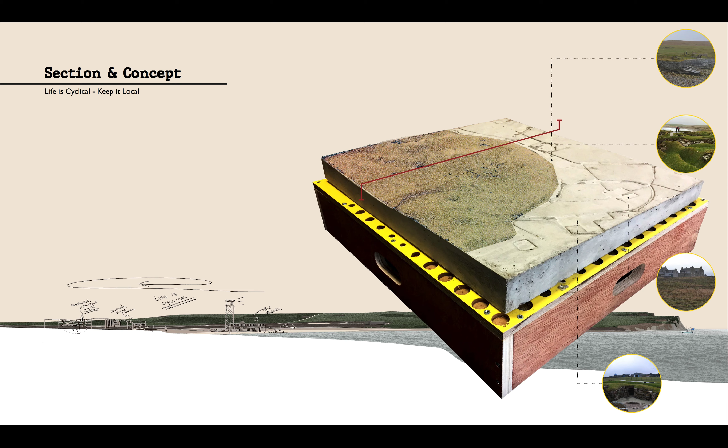One such example is that of the lobster. Ancient Skara Braeans would catch the lobster, then transport it to its own bespoke lobster store, and then cook it on the fire. This project takes the lobster's ancient production line and translates it into a design for a modern, self-sufficient community. So, zooming into the bay, we're building on that production line in its modern format. We have the boat, warehouse, restaurant and dwelling.

And then the site, we have the bay and its water coming up the beach. Then we have the beach road, the only road. And then we have two unexcavated Neolithic sites further inland. And building the master plan, we do so aligned with the production line. So we begin with the boats to catch the lobsters for people to eat, then a boathouse to dock in

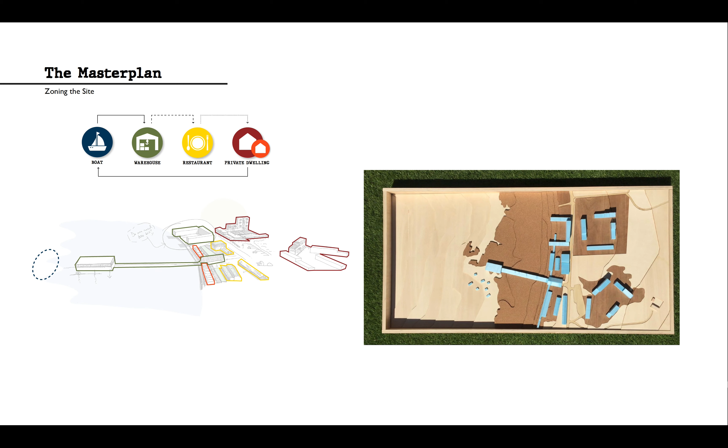with research facilities to enable on-site aquaculture, a pier to connect to the land, then private homes for the crew of these boats to live in, and shared facilities for this collection of people to live as a community. And finally, some shoreline housing to protect the inland development from the rising tides. So, to reiterate, we get boat, warehouse, restaurant and dwelling.

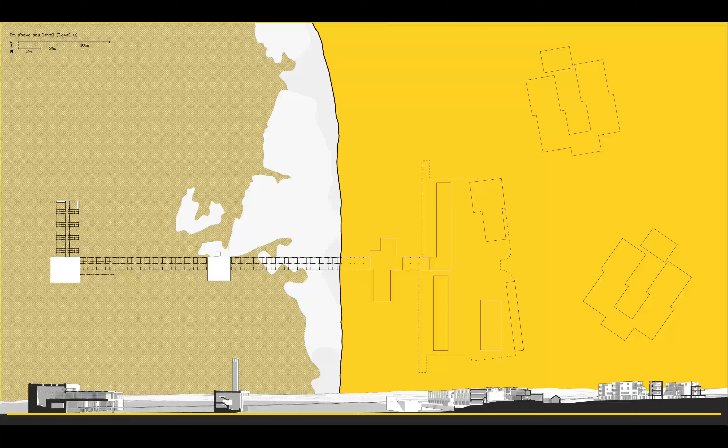And now the proposal. We see the model self-sufficient community positioning itself across the transition between land and sea, operating as a working settlement primarily in the fishing of lobsters with additional crop cultivation and provision for approximately 200 inhabitants across 96 homes. And the proposal is situated along the bay from Skara Brae, creating a juxtaposition between ancient and contemporary. So beginning at sea level, the settlement rises from the water before then emerging from the land.

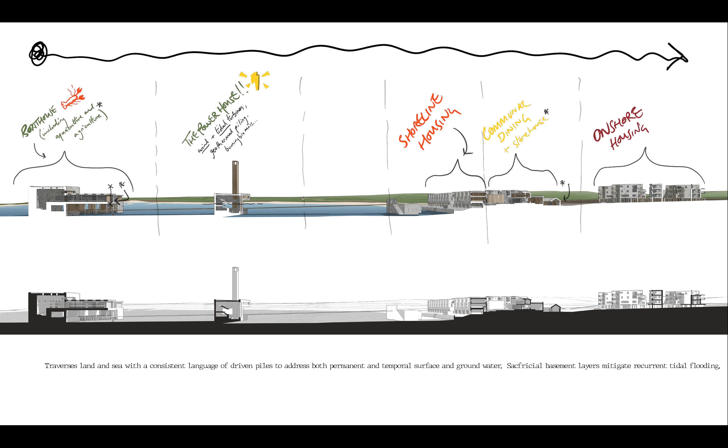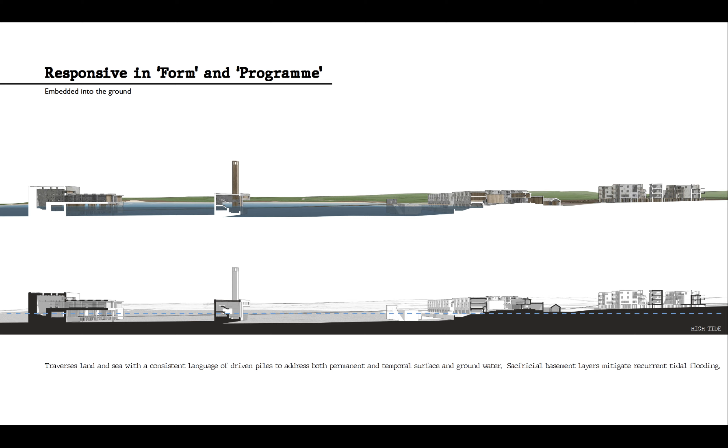And the settlement as a whole traverses land and sea with a consistent language of conversation between driven piles and bulk mass. And the production line is maintained in the programme. And through both form and programme, the architecture is able to respond to the environmental conditions in which it sits. So tidal flooding is mitigated by using sacrificial ground floors and through programmatically assembling technology in warm spaces above the high tide level.

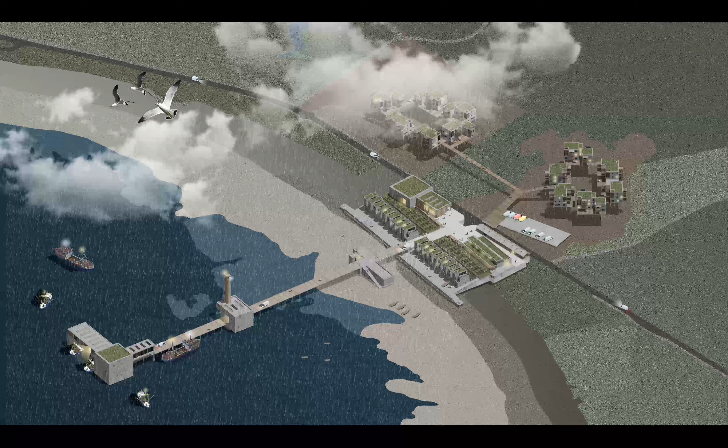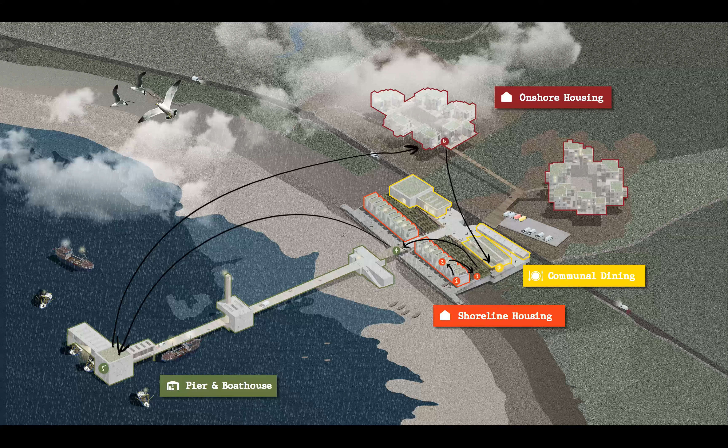So to delve deeper into the project and at a human scale, we should look at a day in the life of one of our residents, and specifically it is a day in the life of Alex and Mickey, a married fisherman and fisherwoman couple of Venezuelan and Italian nationality that left London for Orkney to escape ongoing social hostility. So this is the route of their day, starting in the shoreline housing, going to work in the boathouse, passing by the onshore housing after work, and finally coming together to eat with friends in the communal dining space in the evening.

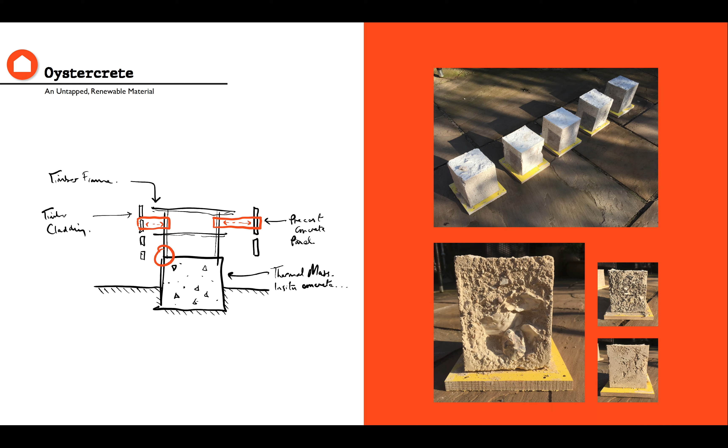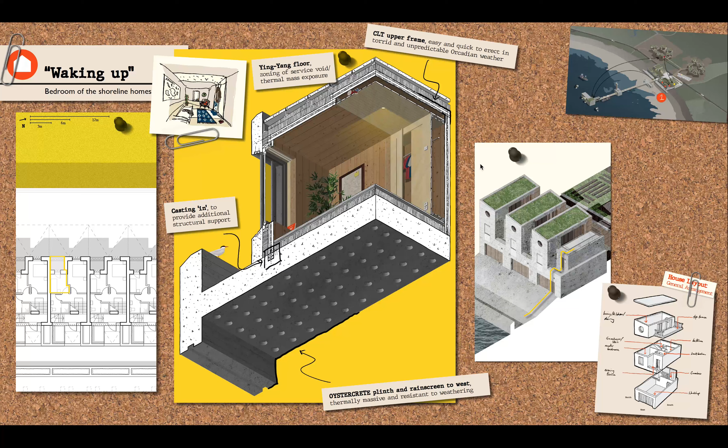So as a result, the shoreline homes use oystercrete's mass to form an unheated plinth cast into the ground, on top of which sits a lightweight cross-laminated timber frame. This construction allows the inside of the home to be sealed quickly in bad weather. Importantly, there are no wet trades within the homes except for the oystercrete of the plinth and the western facade, allowing for future disassembly. Within the CLT floors, a transfer joint is used to provide what I term a yin and yang floor. This allows the home to benefit from both thermal mass exposure and provision of service voids.

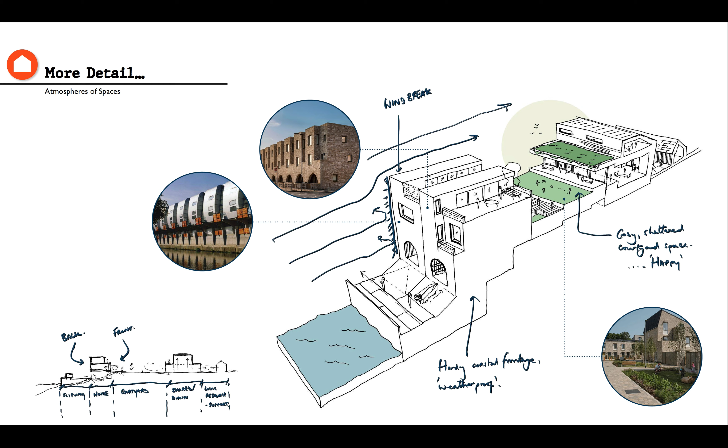Next, it's time for breakfast in the home. Designed conceptually as a cliff face, these shoreline homes provide shelter from the Bay of Skaill's Arctic winds and driving rain for a cosy and more gentle microclimate to manifest behind them.

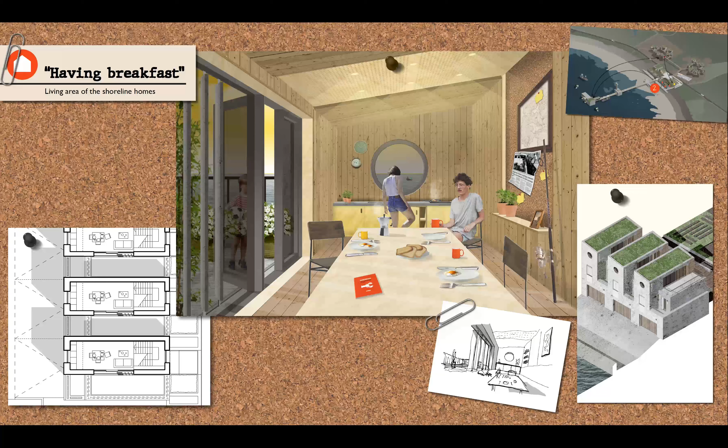Facades exposed to the south and west's harsher weather are clad with a cast in situ oystercrete. The remaining north and east facades will reuse the oystercrete formwork as a timber rain screen cladding, as seen here in yellow. So that's how the homes sit and how they're treated externally.

Internally, as I say, it's time for breakfast, and now we're located within the top story of one of the shoreline homes. Now, before this project was undertaken, Studio Material Amendment designed and built a mobile studio and made a tour of Scotland, visiting several model communities. The sense of ownership gained from building the mobile studio, along with its temporary nature, has informed the internal environment of not only the shoreline housing, but the entire Love, Life and Lobsters master plan.

And the idea is that the non-structural elements, so the service voids from the yin and yang floors, use relatively low-tech materials and fittings so that residents can adapt homes to suit their needs, styles and general preferences over time. In contrast to this largely prefabricated interior, externally the homes are detailed sparingly to tie the built form back to the battered and bruised landscape.

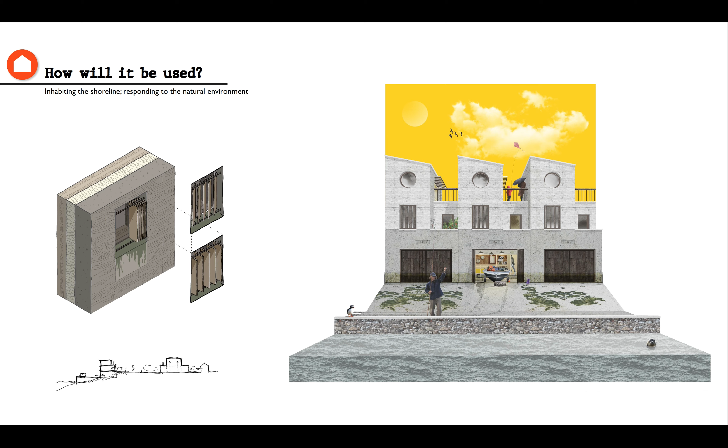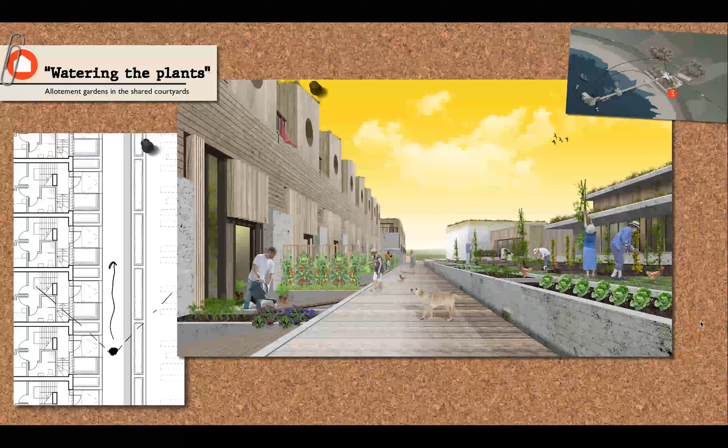Next, it's time to water the plants before work in the communal garden growing space. Much of the shoreline home's eastern facade is open to this space and lined with thermally massive oystercrete. This creates a greenhouse effect within the entrance hall, which can not only be used as somewhere to grow starter plants, but also radiate heat generated from the morning sun throughout the home for the rest of the day. And as the seasons and conditions change, so too does the garden environment.

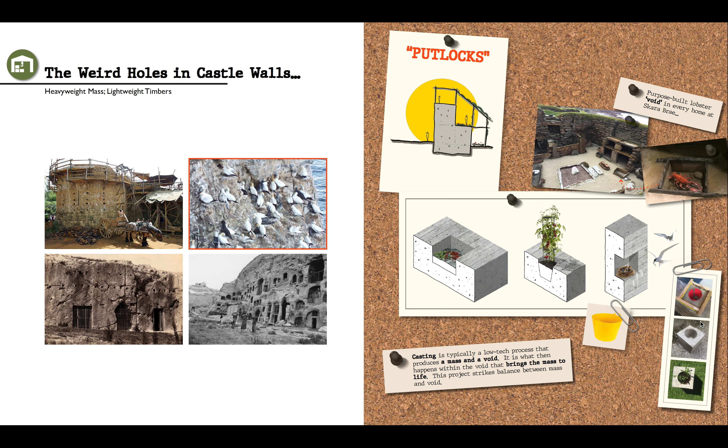As we go to work in the boathouse, we travel along the pier. The pier uses oystercrete and timber. The combining of these materials requires striking a balance, and for this we consider putlogs, or the weird holes in castle walls where scaffolding once sat. Casting is typically a low-tech process that produces a mass and a void, the void usually created by a timber element.

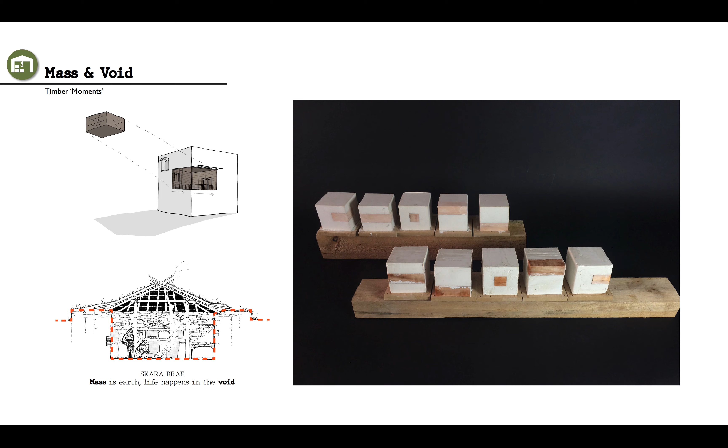It's what happens in this void that brings the mass to life, whether it be a lobster pot or a bird's nest. And the homes of Skara Brae followed this mass and void concept, where the ground served as the mass and inhabitation happened in the void. These voids of timber moments, as I call them, happen throughout the scheme and are seen here as the power tower pierces through the oystercrete switch house. And the buildings along the pier sit in the water as concrete islands sewn together with an ex-formwork deck.

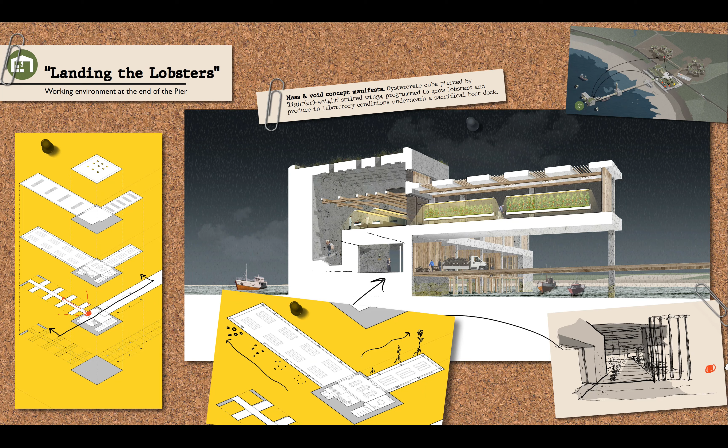Once at work, we're landing the lobsters in a boathouse. Using that mass and void concept, the main concrete cube is pierced by two lighter weight stilted wings. These wings each house laboratory-based aquaculture and agriculture.

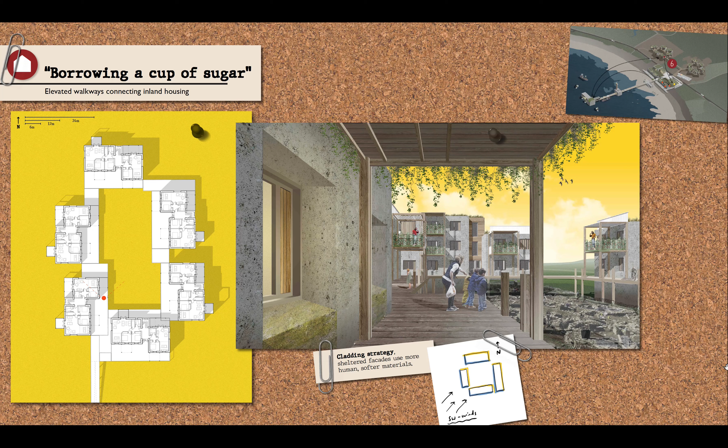After work, we pass by a friend's house in the onshore housing to borrow a cup of sugar. Constructed above an unexcavated Neolithic site, these apartment-type homes treat the ground as sea, so not to unnecessarily disturb the ruins. This brings a cohesion to the project in using a similar language both offshore and onshore.

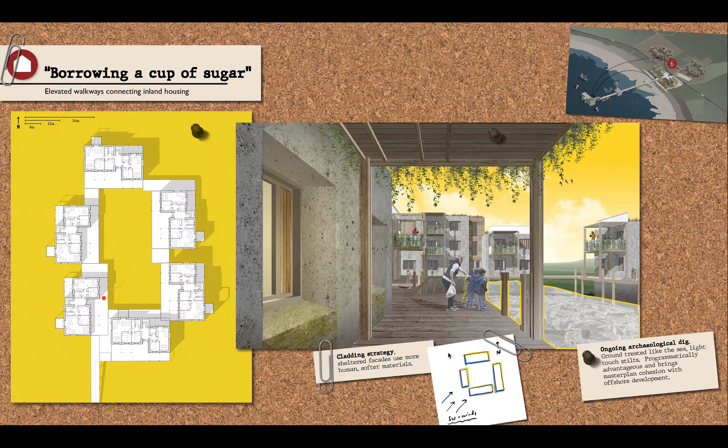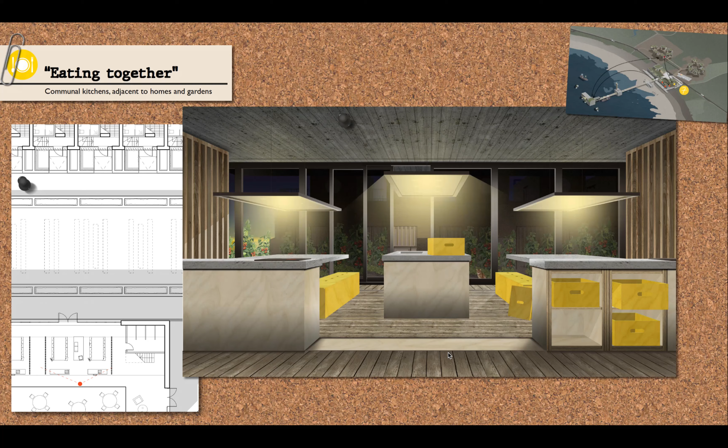And finally, it's time to end the day by eating together in the shared dining room. The communal dining spaces continue the language developed throughout the rest of the master plan and provide space to share meals together. We are social creatures, and human interaction and sustenance are basic needs. The shared meal has a power. The power of the shared meal was recognised in ancient Skara Brae. It was recognised in the mobile studio, and it is recognised in the design for the Love, Life and Lobsters model community.

I've spoken at length of this project in both present and future tense. The recycling of oyster shells and timber formwork, the harnessing of solar, tidal and wind energy, and the on-site embedded growth of sustenance present elements of an ethos intent on maintaining a good environmental conscience in the midst of the ongoing climate emergency. However, it's important to also consider the project in the eventual past tense.

In the ongoing emergency, sea levels are rising and will inevitably rise to a point where inhabitation of this site is no longer viable. As already stated, other than the oystercrete, there are no wet trades involved in the building of this master plan. Therefore, when the time comes, the entire master plan may be disassembled and either recycled or reused elsewhere, leaving behind a ruin of modernity to speak with its ancient counterpart across the bay. And life continues.